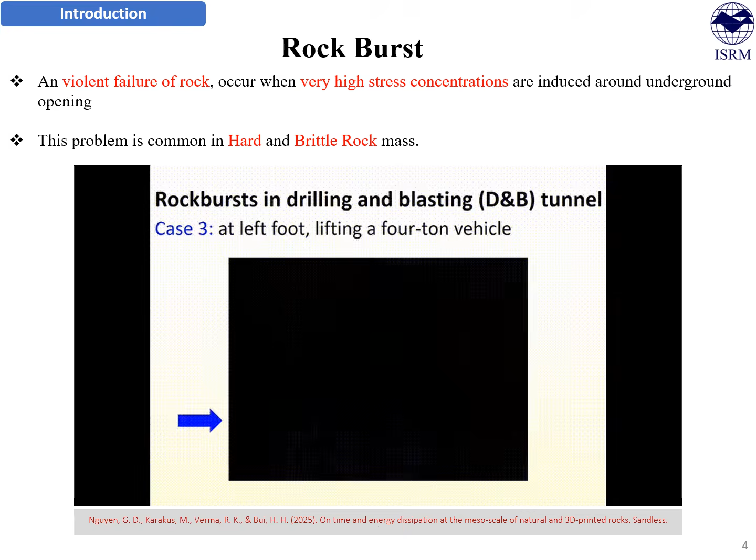Rock burst is a broad term often used to indicate a violent failure of rock in deep underground mining conditions. When I say deep underground mining conditions, I mean high in situ stress scenarios. As we go deeper, the in situ virgin stress keeps increasing, and when we excavate underground in such a situation, the stress around the opening further intensifies, which often, especially in hard and brittle rocks, results in violent failure of rock.

One example is shown in this video where a bursting event has occurred and it has lifted an entire 4-ton vehicle.

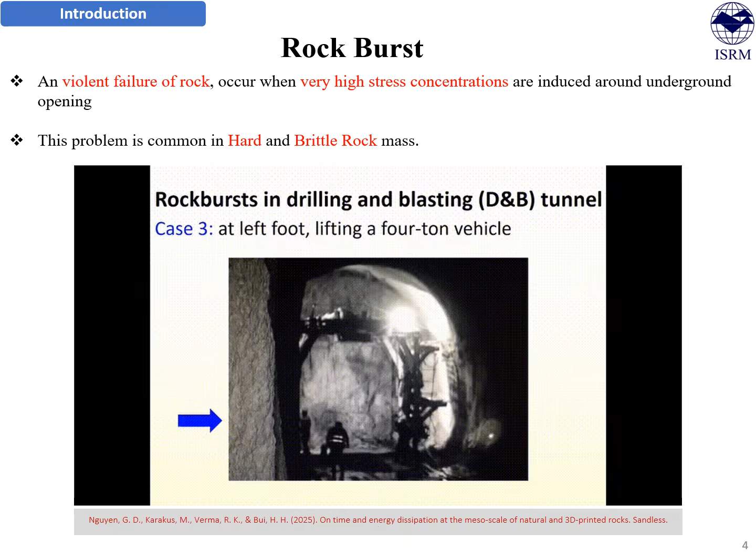This video presents another example of bursting, that is rock burst. It will occur on the right hand side floor of this drive. You can see - as you can see, these two miners narrowly escaped this event, which is not very common.

Often the bursting occurs at relatively higher magnitude, which results in severe consequences including loss of lives, delay in project, economic loss, loss of time, and sometimes it also triggers seismic events, which of course can be fatal.

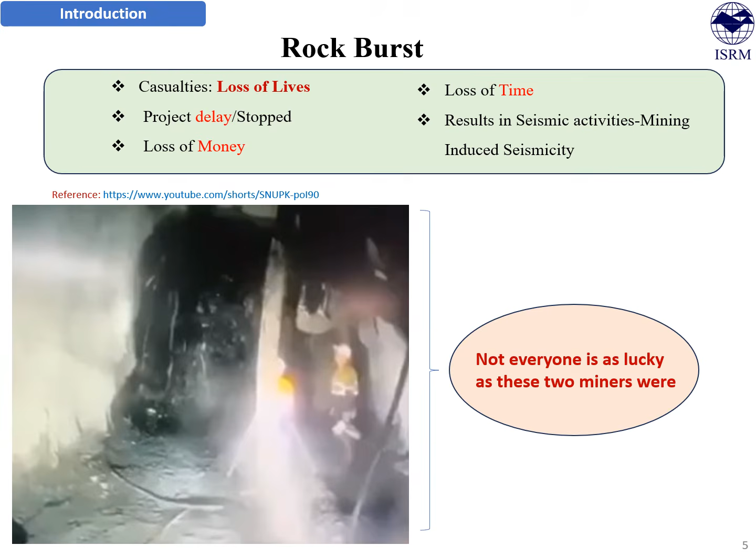As I mentioned earlier, rock burst is a broad term. There are different classifications of rock burst available in the literature. Some of these are pillar burst, strain burst, and fault slip burst.

This work is focused on strain burst, that is bursting of rock around underground openings in deep underground mining conditions because of high stored elastic strain energy. When we go deeper, the rock mass is highly stressed, and when we excavate, the strain energy stored in the rock mass around the opening sometimes exceeds its requirement to cause failure. That excess strain energy releases when we provide a free face in the form of excavation, and that release of excess strain energy is often violent, in the form of bursting - that's what we call strain burst.

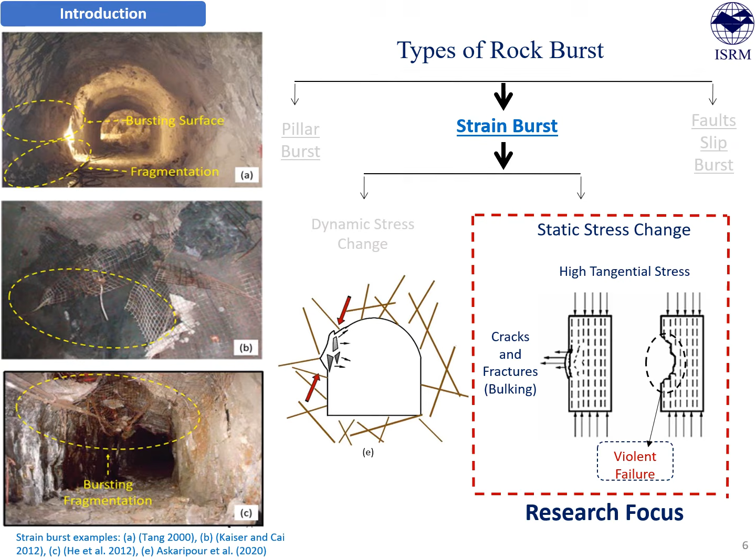You can see 3 examples of strain burst where mesh bulking and failure in the back and the side walls has occurred because of this violent event.

Strain burst is a complex problem. If we look at underground scenarios, each scenario is different, so explicit evaluation of bursting can be very complicated and may not be practical. However, we need to understand that if the rock in the rock mass around the underground opening has the potential to burst, strain burst may likely occur. However, if the rock lacks the potential to burst, then under in situ conditions it is very unlikely that strain burst will occur. So the focus of this research was to develop an energy based framework to quantify the burst potential of rock.

So to evaluate this, there are four main factors to be considered. The first is material property, which in principle controls the mechanical response of rock in any loading-unloading conditions. The second factor is in situ stress conditions, that includes virgin in situ stress and redistributed in situ stress after excavation, which indicates change in the boundary conditions. The last aspect is the geometrical aspect, meaning the specimen or size of the rock around the opening, which in principle is controlled by in situ discontinuities in the form of faults and fractures.

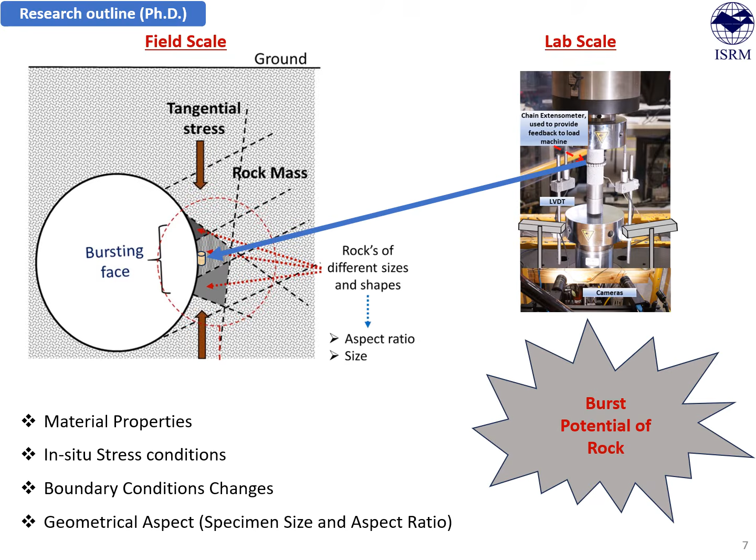Now, to start with, the material properties. There are three main categories of material properties required for the estimation of burst potential. The first one is strength, that includes strength of rock under compression and under tension.

For compression, we have standard uniaxial compression strength test. Their lateral control is also available to capture the true post-peak behavior under compression. In terms of tension, we have indirect tensile strength test, called Brazilian disc test.

Now, the applicability or the reliability of its tensile strength estimation has been under debate for very long because it depends on the crack initiation point. In the literature, it's been established that if the crack initiates at the center of the disc, then the corresponding result for tensile strength estimation is reliable, else it is not. So that was one thing we need to focus on in this research.

The other properties are elastic properties, including elastic modulus of rock and Poisson's ratio, and energy dissipation characteristics of rock, that include fracture energy in shear band when the rock is subjected to compression. This can be evaluated from uniaxial compression strength test or triaxial test.

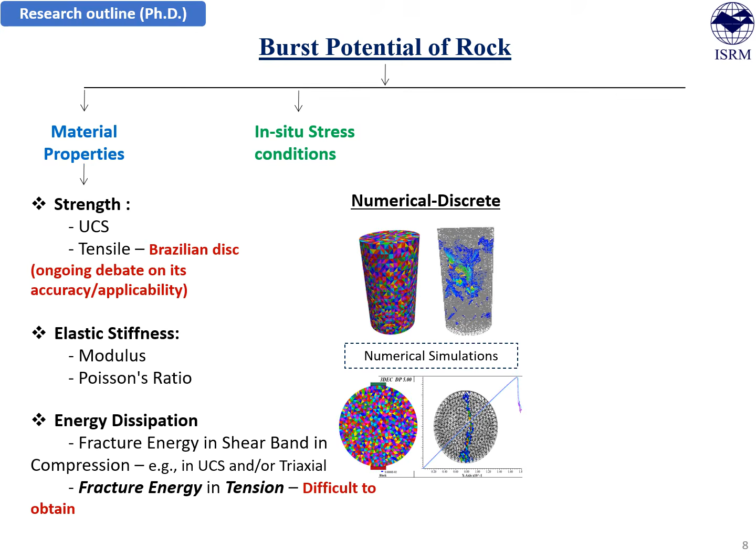The other factor is in situ stress conditions, followed by changes in boundary conditions. Now, when we excavate, obviously, we provide a free face to the rock around the excavation to dilate. That change in boundary conditions enables rock to release its excess strain energy, and the amount of excess strain energy governs the magnitude of bursting, which needs to be evaluated while calculating the burst potential of rock.

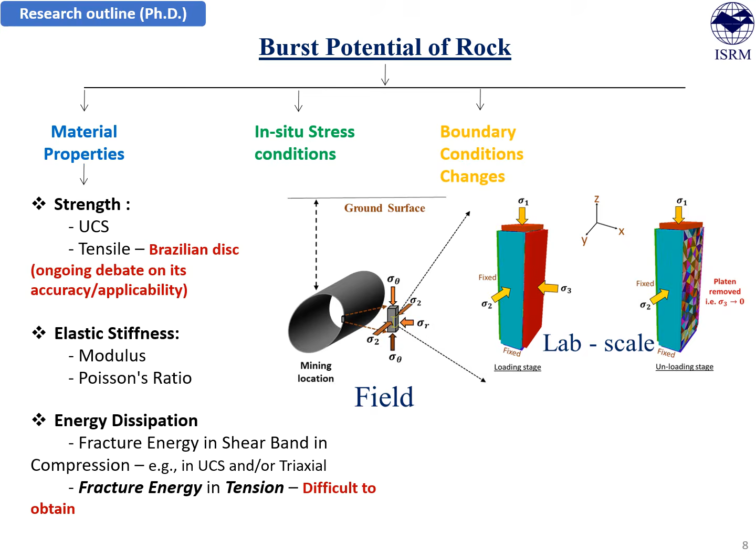And at last, geometrical aspect. There are two categories for that: one is aspect ratio and second is specimen size. When we say aspect ratio, that means if we keep the width and breadth of the specimen constant and keep increasing the height, we are changing the aspect ratio of the specimen. And with that change in aspect ratio, how the burst potential of rock varies needs to be considered.

And the specimen size as well. That means as we keep increasing the size of the specimen, what effect we get on the burst potential of rock. These factors have to be taken into account when we calculate the burst potential of rock, because in underground in situ scenarios, the size of rock is beyond our control. It is governed by in situ discontinuities, which is very difficult to capture for each and every cut in underground mining scenarios, when we take cuts in drives and when we fire stopes.

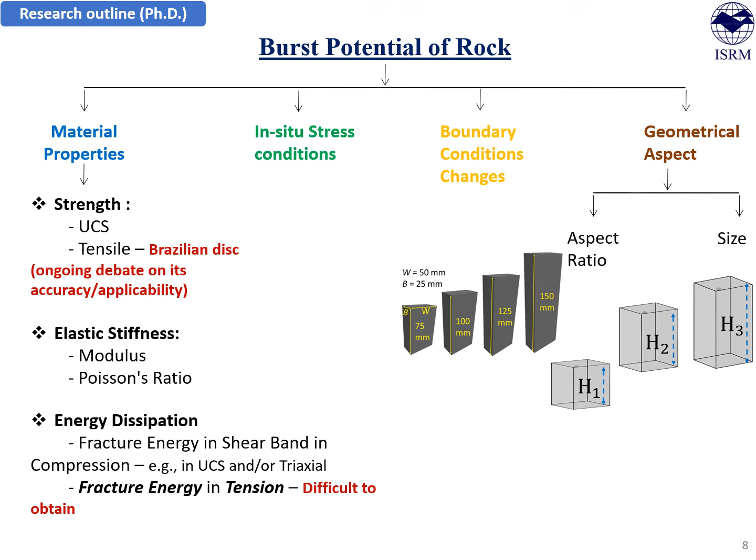Now, to address this problem, what we did in this research is systematically collaborate three approaches: experimental, numerical, and theoretical, because we understand that no single approach is sufficient enough to address this complicated problem.

Now, from the experimental approach, the intent was to get the required material properties: strength, elastic, and fracture properties. As I mentioned earlier, the fracture property in tension was difficult to obtain from conventional approaches, and that motivated us to develop a new experimental approach called AUSBIT, that is the Adelaide University Snap-Back Indirect Tensile Test. Now these experiments enabled us to obtain required material properties, including strength, elastic, and fracture.

And the AUSBIT experimentation also provided a preliminary indication of the burst potential of rock, that was later verified from developed theoretical and numerical approaches.

In terms of numerical approaches, we adopted a hybrid 3DEC Itasca framework where the tetrahedral blocks are zoned to ensure that they are deformable. These deformable tetrahedral blocks form a continuum frame, and these tetrahedral blocks interact with each other via contact. Now the behavior of these contacts is controlled by a contact model, which plays an important role in capturing the fracture in the given rock specimen.

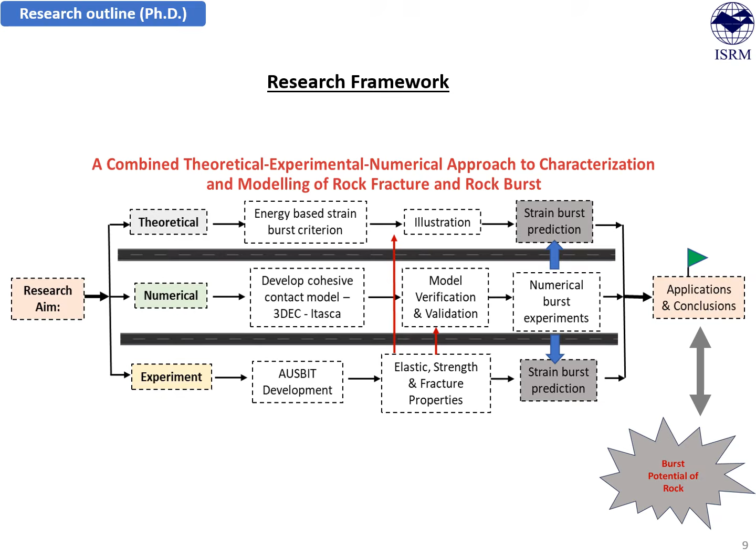Now to provide further details, we will go through these individual approaches one by one, starting with the experimental approach.

As I mentioned earlier, the aim of the experimental approach was to estimate the required material properties including strength, elastic, and fracture properties. For that purpose, we started with two conventional approaches named uniaxial compression strength test and Brazilian disc test.

The UCS, or uniaxial compression strength test, enabled us to calculate UCS strength and elastic properties including elastic modulus and Poisson's ratio. When we started doing the Brazilian disc test, we realized there are two key issues associated with this experimentation. The first one is its reliability. In the literature, we found that the reliability of these results heavily depends on the crack initiation point when the disk specimen is compressed diametrically. And the second issue we found is the uncontrolled cracking of the disk specimen, which is the result of local scale uncontrolled dynamics, which has not been addressed efficiently in the available literature.

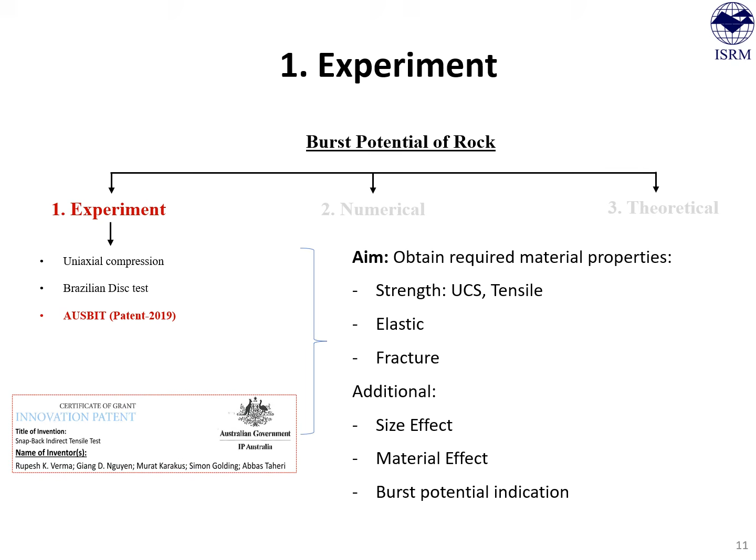Now, the Brazilian disc test. You can see it's a simple experiment. In this experiment, we take a disc shaped specimen and we compress it diametrically and record load versus displacement response. We capture the peak load at which the specimen cracks. Now that peak load P is linked with the tensile strength of the material. Simple experiment and easy to perform.

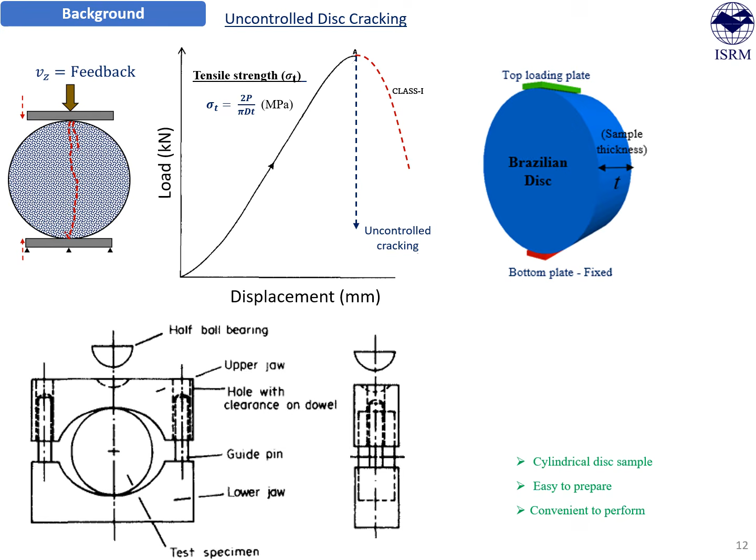Now the issue was, first, the reliability of the tensile strength test. In the literature, it was established that if the crack initiates at the center of the disc specimen, then the corresponding peak load will provide a reliable estimation of tensile strength. However, in the literature, and in laboratory experiments also, we have seen that often the crack does not initiate at the center of the disc. Instead, it initiates at the loading ends because of high localized compression. Now, in those scenarios where the crack is not initiating at the center of the disc specimen, the reliability of the tensile strength estimation can be debated.

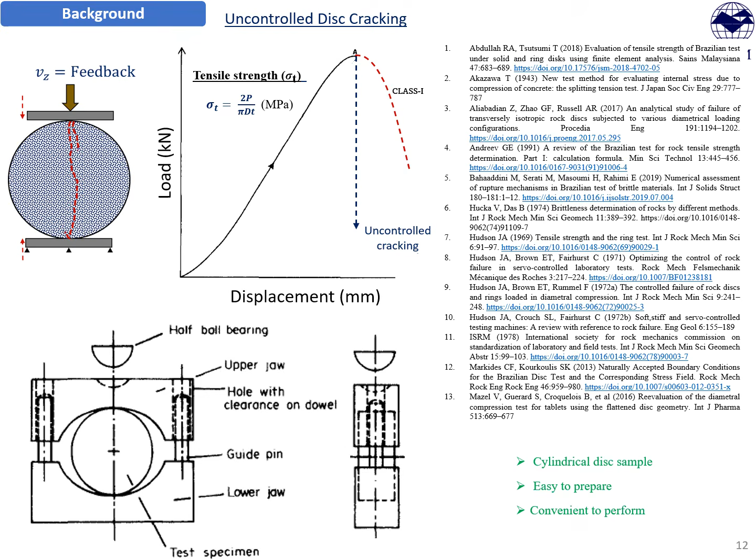The second aspect is its uncontrolled dynamics. We can see that this experiment can efficiently capture the class 1 behavior of rock. However, it cannot capture the class 2 behavior, which is more common in hard and brittle rocks. In those cases, as we reach the peak load P, the specimen cracks uncontrollably and the load drops immediately to its residual strength. There was no way it could capture the class 2 behavior, which indicates the true mechanical post-peak behavior of the given rock type or brittle material.

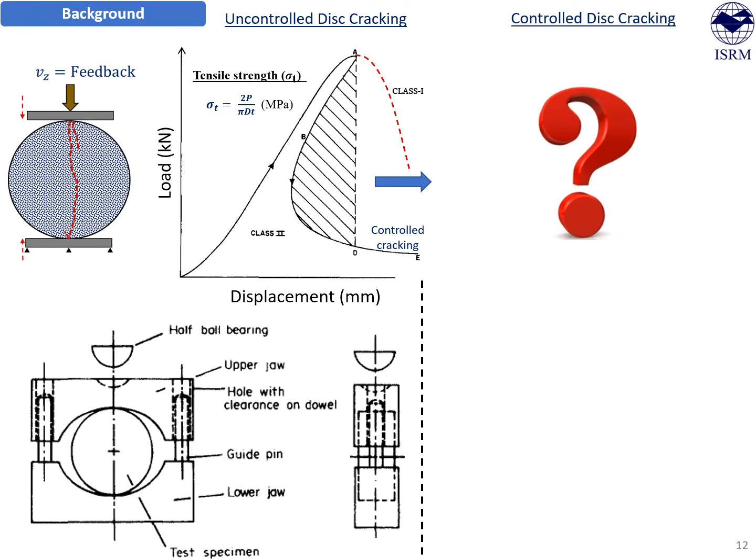As mentioned earlier, the first issue was the correct tensile strength estimation. So we started using advanced instrumentation. We thought with a high speed camera, using digital image correlation technique, we could capture the local scale behavior in quantitative terms and link it with material property, like tensile strength estimation.

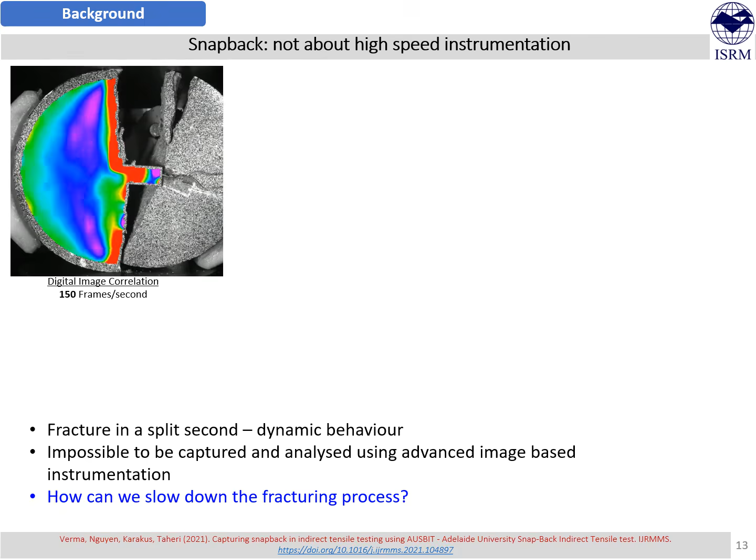However, we realized that the disc specimen cracks in a fraction of a second, which is very quick. We can see the cracking pattern as well, which clearly shows that the crack happens, and thereafter there has been a release of excess strain energy, which might have resulted in these secondary cracks.

Now, with the high speed camera, we tried different frames per second with different image capturing speeds. We started with 5 frames per second and extended it to 150 frames per second. However, with all these variations in frames per second, we realized that the local scale dynamic is so dominant that it couldn't allow us to quantify or capture the local scale behavior in quantitative terms to link it with material property.

And that made us realize that snapback is not about high speed instrumentation, but about the local scale dynamics. If we could control this local scale dynamics associated with disk cracking, we could enable efficient application of digital image correlation or high speed instrumentation. Otherwise, these approaches could be limited to strain contours without any quantitative assessment.

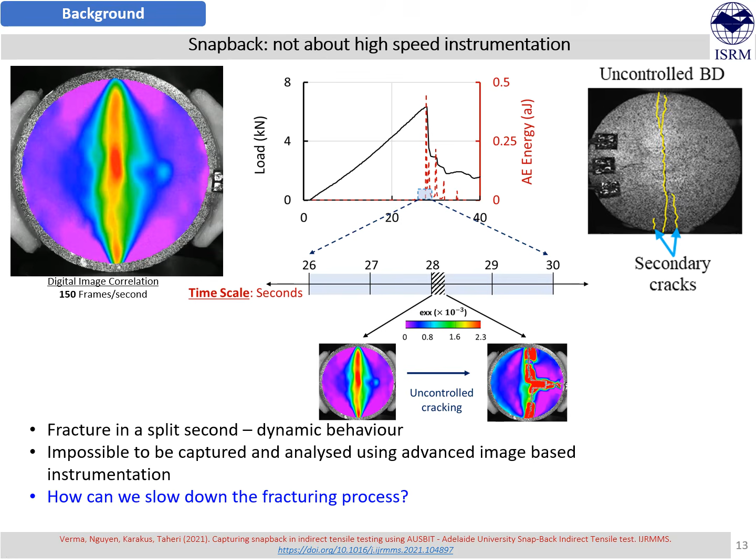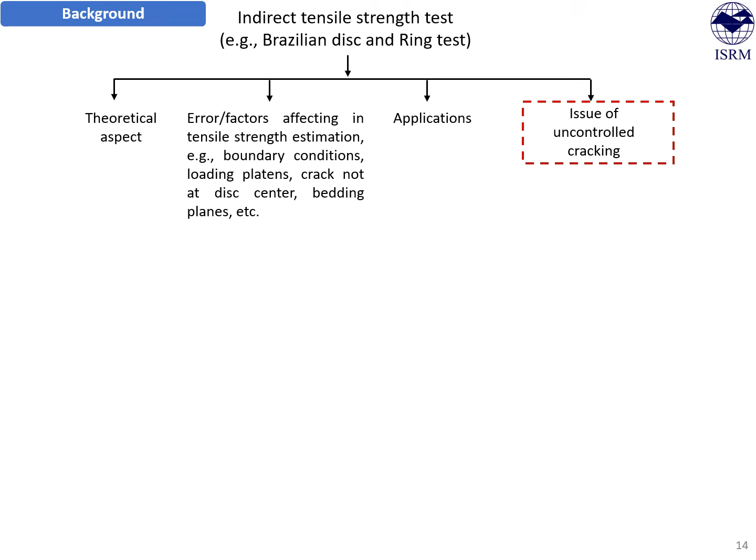Thereafter, we again went back to literature to evaluate whether anything has been done regarding this issue of uncontrolled cracking. We realized lots of work has been done. However, most of this work around indirect tensile strength testing focused on ensuring crack initiation at the center of the disk. Literature recommends changes to the loading angle to ensure the crack initiates at the center of the disk specimen. These approaches were successful up to a certain extent, but their application on various brittle materials can be debated. At the same time, we realized the issue of uncontrolled cracking has not been addressed efficiently in available literature.

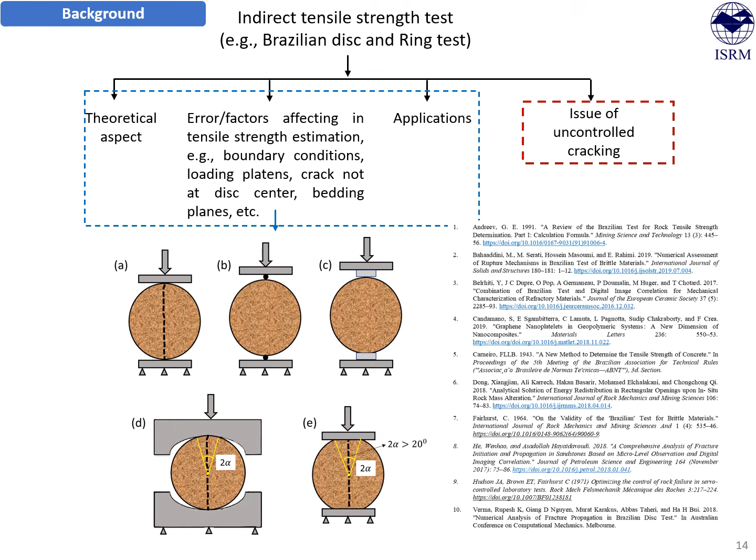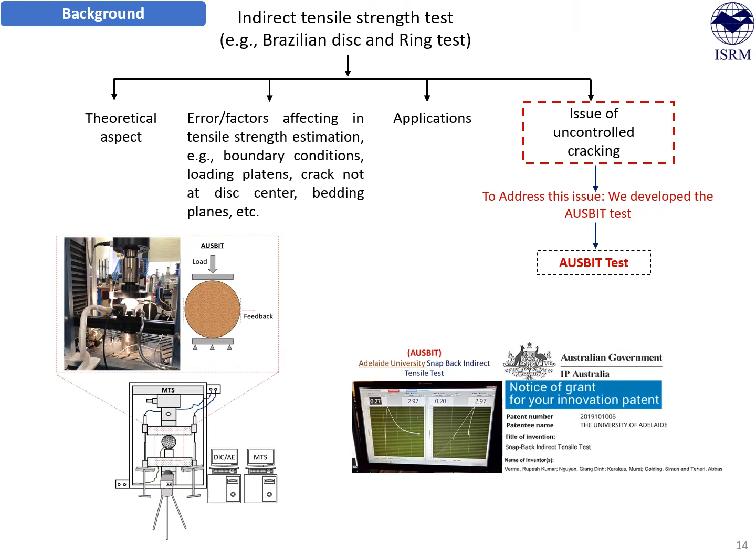That motivated us to develop a new experimental approach named AUSBIT, which stands for Adelaide University Snap-Back Indirect Tensile Test. The AUSBIT experimentation setup is relatively simple, or straightforward we can say.

In this experimentation, we use a lateral LVDT to capture the lateral deformation of the disk specimen, and that information governs the vertical diametrical loading rate of the disk specimen. So what we do in this setup is ensure that the disk specimen undergoes constant or consistent lateral deformation throughout the experiment.

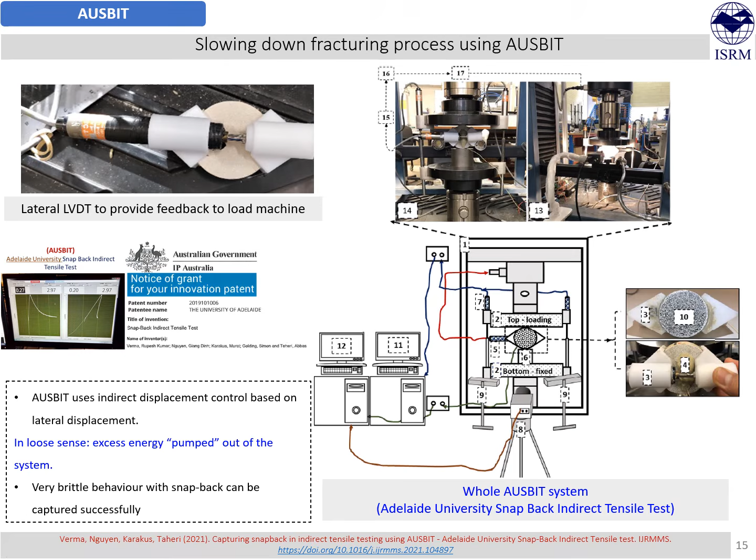That means if the lateral deformation of the disk specimen increases, the AUSBIT experimentation, which uses servo control, tends to reduce the loading rate to ensure the lateral deformation rate further reduces to our predefined level. And if the lateral deformation rate reduces below our predefined level, the vertical diametrical loading rate increases accordingly. By doing that, we were successful in prolonging the instant cracking of the disk specimen.

You can see from these two disk specimen cracking videos that in the conventional approach, the disk was cracking in a fraction of a second. Now the same cracking process has been prolonged to several hours in AUSBIT experimentation.

The acoustic emission energy response indicates that the whole cracking process is a valid cracking process, not the machine's mechanical unloading. You can see there has been a consistent release of acoustic energy, indicating continuous damage during disk cracking under the AUSBIT experimentation post-peak response.

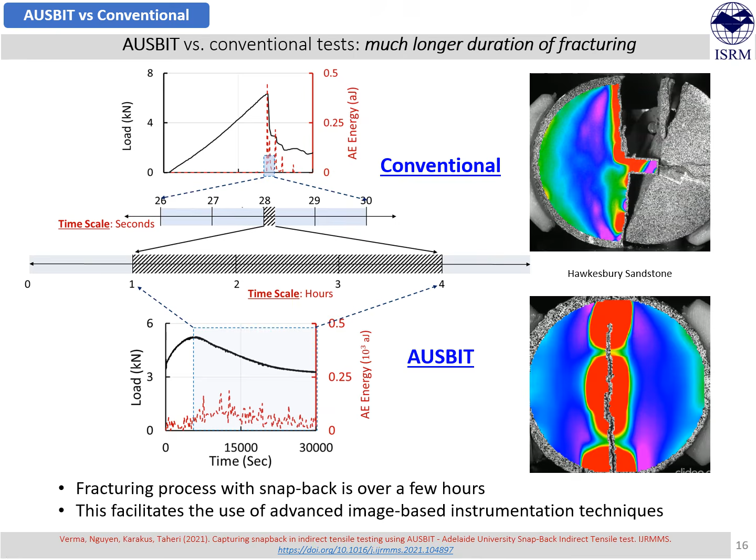The same disk specimen in controlled AUSBIT experimentation can produce true post-peak behavior with snapback response, and the crack shows no sign of secondary cracking. That means the specimen has consumed the amount of strain energy required for the vertical diametrical crack, and the excess strain energy has been successfully removed to enable the snapback response and capture the true post-peak behavior of the disk specimen.

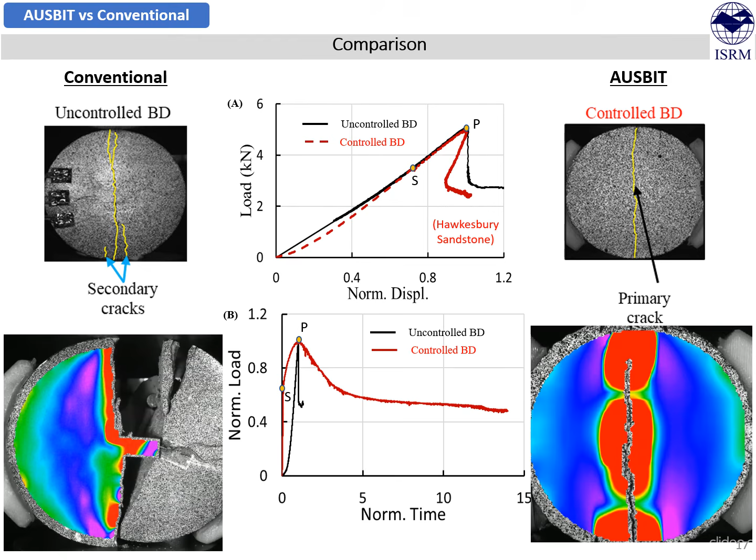In terms of the time frame window, we can see that the disk specimen, which was cracking in a fraction of a second, now has its post-peak cracking behavior prolonged to several hours.

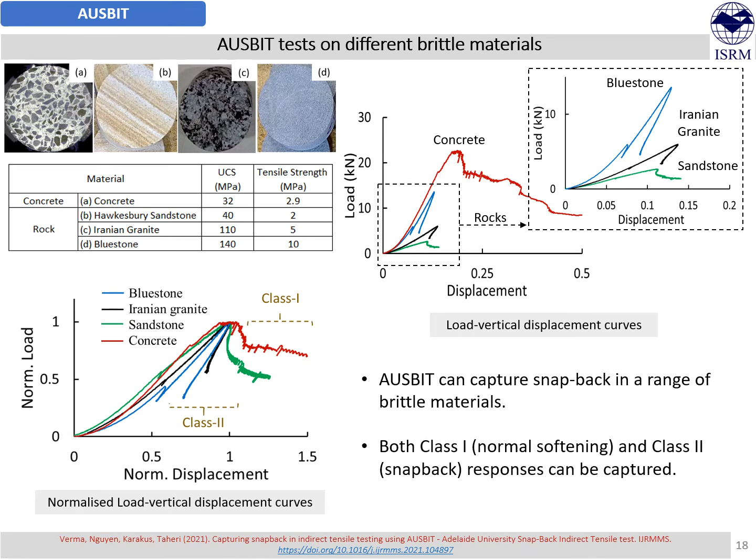Now from the normalized load versus displacement response, we can see that concrete undergoes or performs Class 1 response in terms of its post-peak behavior, whereas brittle materials like rock demonstrate Class 2 behavior. These Class 1 and Class 2 behaviors were both successfully captured by AUSBIT experimentation, which was not possible earlier in the conventional approach.

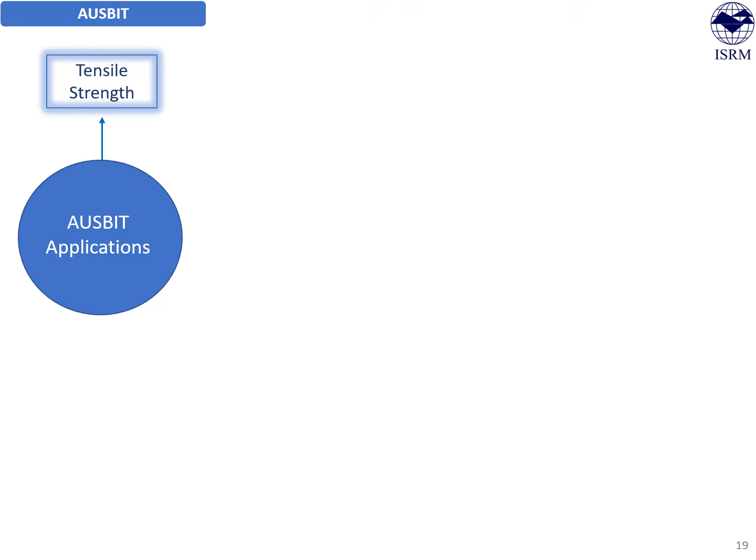Now, yes, AUSBIT can capture true post-peak behavior of disk specimen under diametrical cracking. But what are the other advantages? If we list all the benefits of AUSBIT applications, we can start with tensile strength estimation, which of course is already there. Apart from that, we can calculate the fracture property of rock.

In AUSBIT experimentation, we can capture the snapback response, or true mechanical post-peak behavior of the disk specimen, which wasn't possible in the conventional approach. Now, because of this snapback response, we can calculate the excess strain energy and the strain energy required to cause or create the vertical diametrical crack.

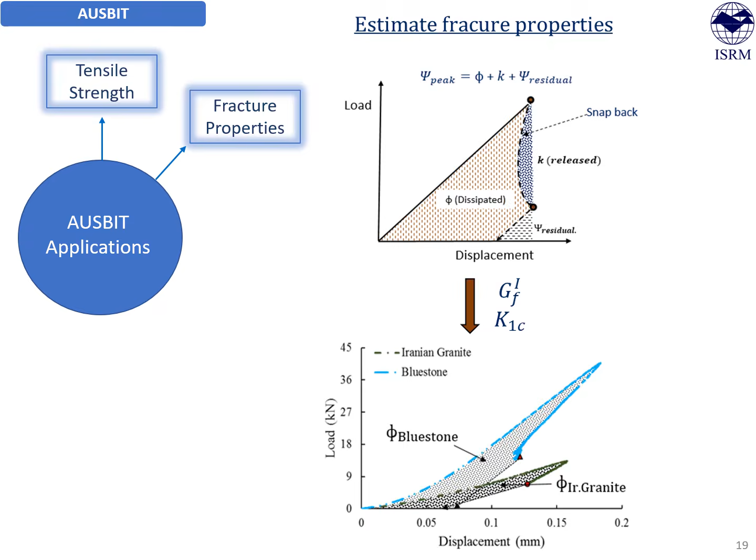With that, now we can calculate the fracture energy and fracture toughness using the same AUSBIT experimentation. In addition to this, we can also assess size effect.

There are two types of size effect: statistical size effect and energetic size effect. Statistical size effect is like as we increase the size of the disk specimen, we end up getting lower tensile strength. This is because as we increase the specimen size, we can expect an increase in the inherent defects, and that inherent defects because of increased specimen size result in a relatively lower estimation of tensile strength.

Now this statistical size effect can be evaluated from the conventional approach and from AUSBIT experimentation as well. However, the energetic size effect cannot be captured or assessed via the conventional approach. However, thanks to AUSBIT, we can now analyze that as well.

The energetic size effect is the effect of specimen size on the post-peak snapback behavior of the disk specimen. As we keep increasing the size of the disk specimen, we expect a relatively higher magnitude of snapback response, because as we increase the disk specimen size, the increase in volume will result in an increase in the strain energy stored in the disk specimen. At the same time, the fracture energy requirement also increases, but that increase corresponds to the fracture surface.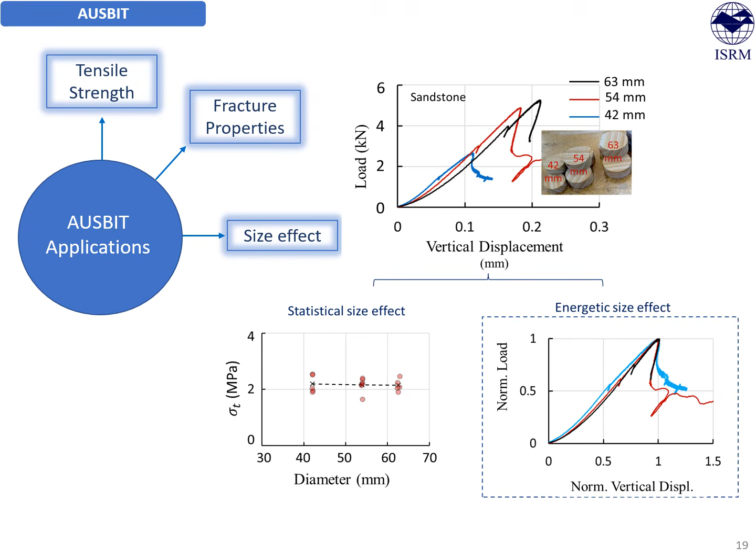Now the difference between these two energy requirements - the strain energy stored inside the disk specimen, which increases with volume, and the strain energy required to cause fracture in the disk specimen, that is the diametrical crack, which increases with crack surface - that difference results in the variation in the post-peak snapback response that corresponds to the energetic size effect, which thanks to AUSBIT we can now capture.

In addition to this, we can also capture the effect of material change on the post-peak behavior. As we have seen in the previous slide, as the material becomes harder and brittle, we observe a higher magnitude of snapback, whereas if the material becomes less brittle like concrete, we observe even class 1 behavior. So both class 1 and class 2 behavior can be captured by AUSBIT experimentation, which could be the result of variation in material effect.

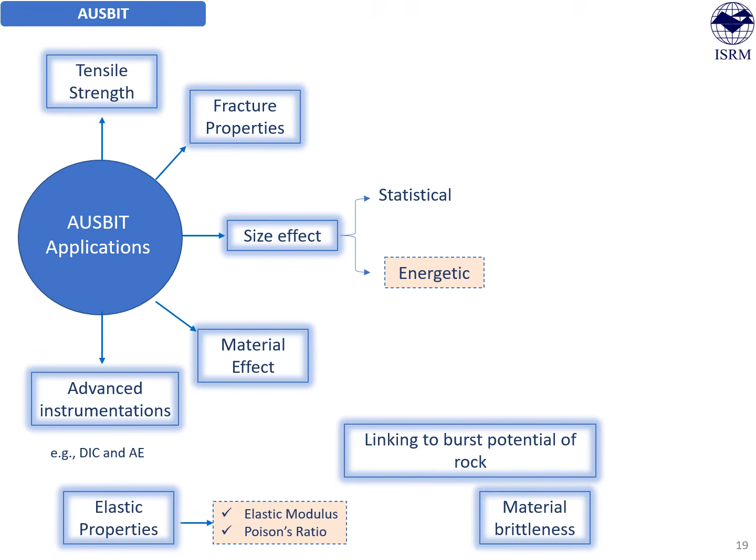In addition to this, as I mentioned earlier, AUSBIT enabled efficient application of advanced instrumentation, including digital image correlation technique and acoustic emission technique. This efficient application of advanced instrumentation enabled us to link the local scale behavior with the material properties in quantitative terms, and that also enabled us to get a preliminary estimation of burst potential of rock and the material brittleness.

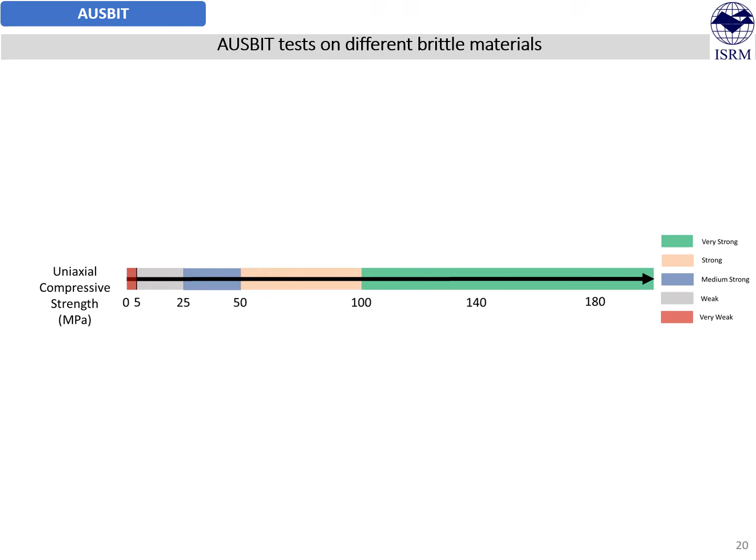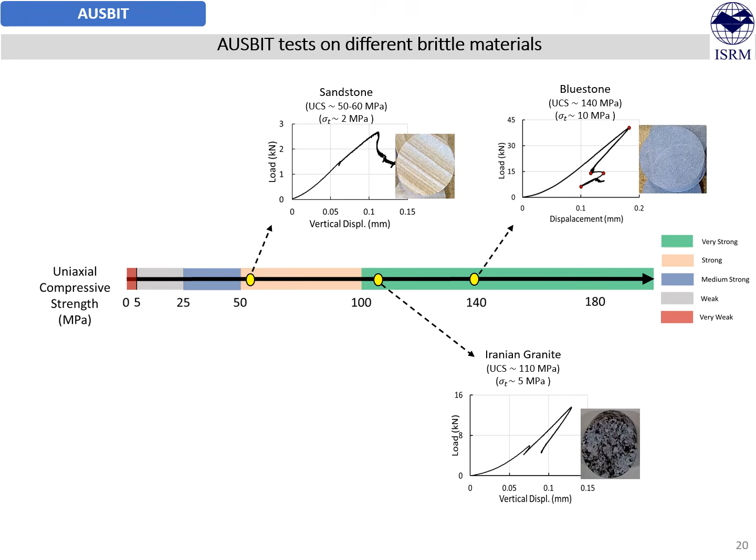With this successful application of AUSBIT experimentation, the next stage was to ensure that this experimentation can be applied to a variety of brittle materials. As I mentioned earlier, we started with Hawkesbury sandstone, and then we extended its application to Iranian granite, which is much stronger and more brittle compared to sandstone. Then we further extended its application to bluestone, which is even stronger and more brittle compared to the earlier two rock types, and we further extended its application to Australian granite as well.

On the other side of the spectrum, we extended its application to concrete, which presented class 1 response as compared to the brittle rocks like bluestone, Australian granite, and Iranian granite. We extended its application to coal as well, and 3D printed cement paste with different bedding orientation. Now as you can see, AUSBIT can be applied to a variety of brittle materials, ensuring its effective and larger application across the varied spectrum of brittle materials.

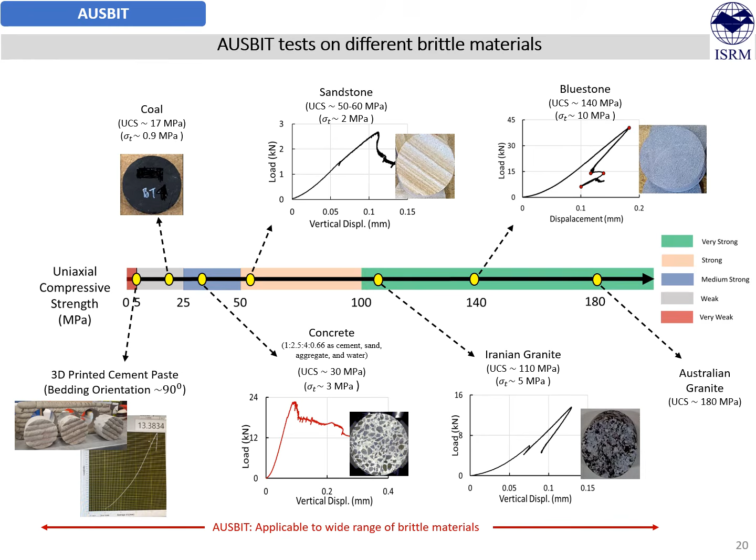After experimental work, the second approach we adopted in this research is the numerical modeling approach. For this approach, we used the hybrid numerical modeling framework provided by Itasca 3DEC. The intent of this approach is to develop a 3D numerical modeling space where we can perform numerical strain burst experiments outside the calibrated dataset. For that purpose, we developed a new cohesive contact model and implemented that model in 3DEC Itasca. The intent here was to capture realistic or reliable cracking behavior, or specimen fracture behavior, under the given loading conditions.

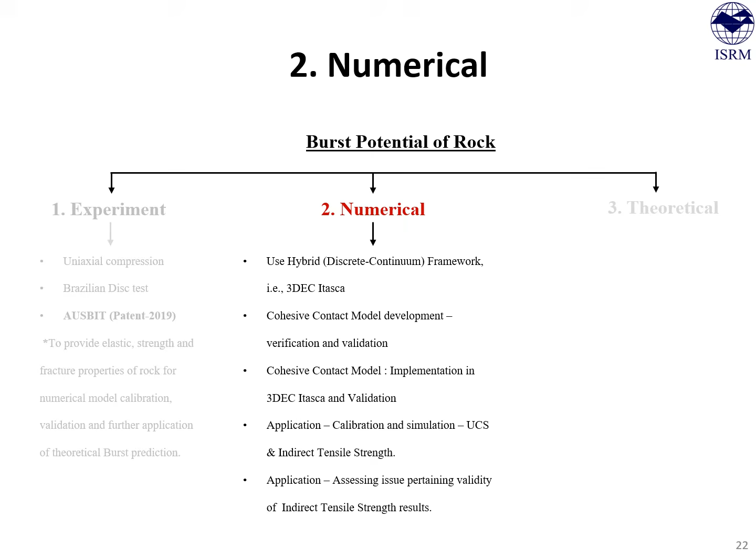We used this numerical modeling framework to calibrate using UCS and Brazilian disk tests, and later used it to perform burst experiments. Now to start with the fundamentals: we can see the rock specimen is basically a combination of grain aggregates, and these grain aggregates interact with each other via contact forces because of intergranular cementitious bonding.

Now when we subject this rock specimen to any given loading condition, for example uniaxial compression, this specimen cracks because of the loss of intergranular cementitious forces, and the crack in majority of cases is due to the loss of these contacts, not because of grain crushing.

Now to mimic that fracture process numerically, in 3DEC we use 3D tetrahedral blocks. These blocks were made deformable via zones, and they interact with each other via a contact model. This contact model plays an important role in capturing the intergranular cementitious forces.

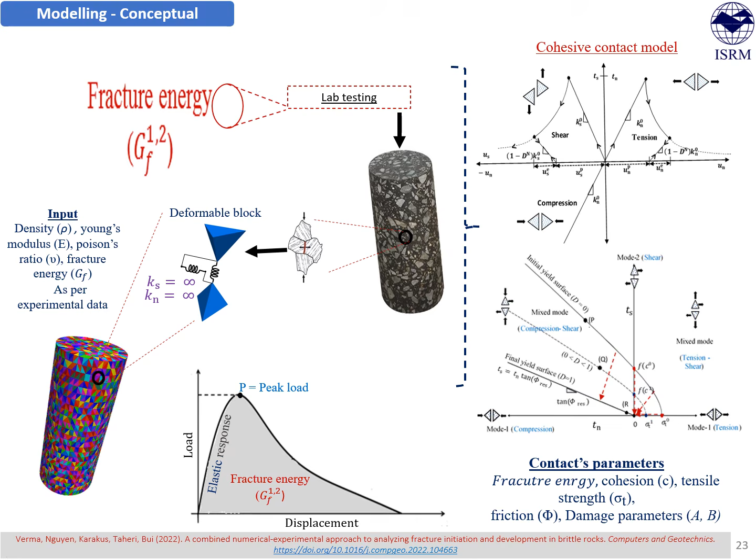That motivated us to develop our own cohesive contact model and implement that in 3DEC Itasca. The details of this cohesive contact model can be seen in the publication shown below in the slide.

The contact model under tension in post-peak behavior results in gradual degradation of strength, unlike immediate drop as shown in various available models in 3DEC and in other published literature as well. And the same goes under shear.

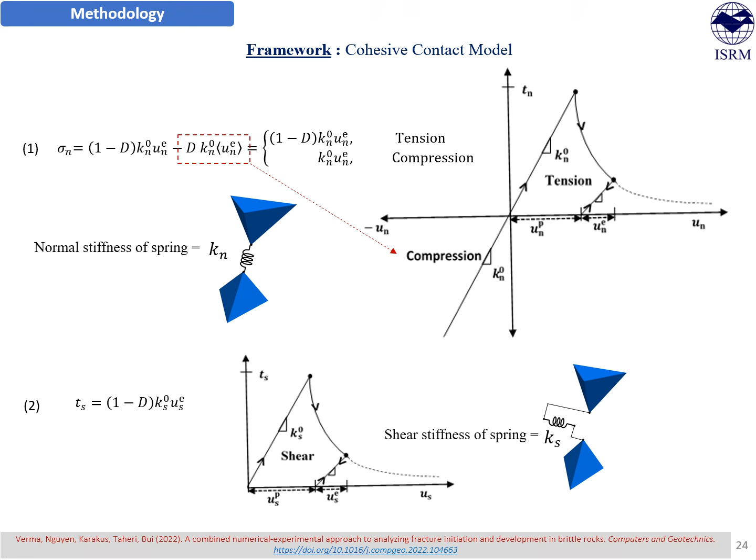The post peak strength of the contact degrades gradually, and that degradation corresponds to the damage. The magnitude of damage not only controls that degradation but also degrades the elastic response as well. So before peak we have certain stiffness, and that stiffness reduces with damage in post peak response, which is truly captured by this contact model.

This cohesive contact model also proposes a unified yield surface, and that yield surface evolves with damage. As the magnitude of damage increases, the yield surface shrinks, and eventually when damage reaches its maximum value, it shrinks down to the residual yield surface to capture the cracking process, the post peak degradation of contact strength.

The same goes for plastic potential, and the parameters this cohesive contact model uses are cohesion, tensile strength, friction, and dilation. Cohesion and tensile strength can be obtained from experiments directly; other properties need a bit of calibration. The damage is indicated by D, which increases with plastic deformation of the contact.

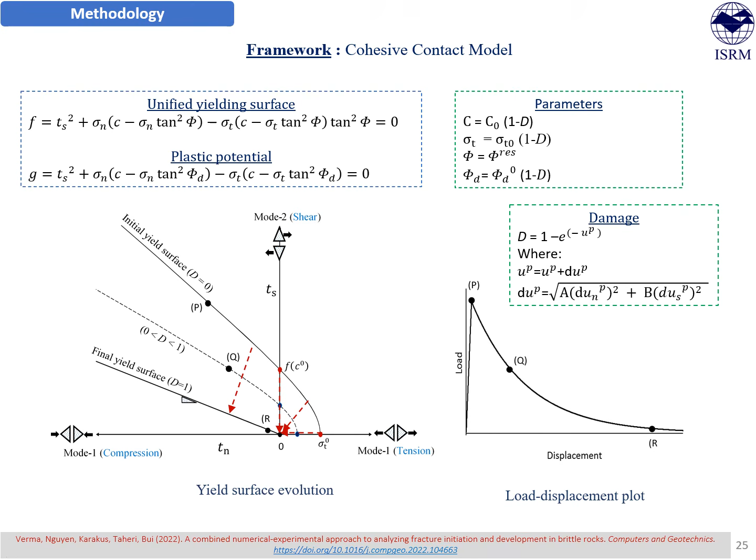Once the contact model was developed, it was verified using analytical solutions and numerical solutions, and thereafter it was validated using a mixed mode loading experimental case available in the literature.

And once it was validated, it was further implemented in 3DEC. For that purpose, we used the user-defined option in 3DEC and fish coding along with C++ programming to write that cohesive contact model code and implement it in 3DEC.

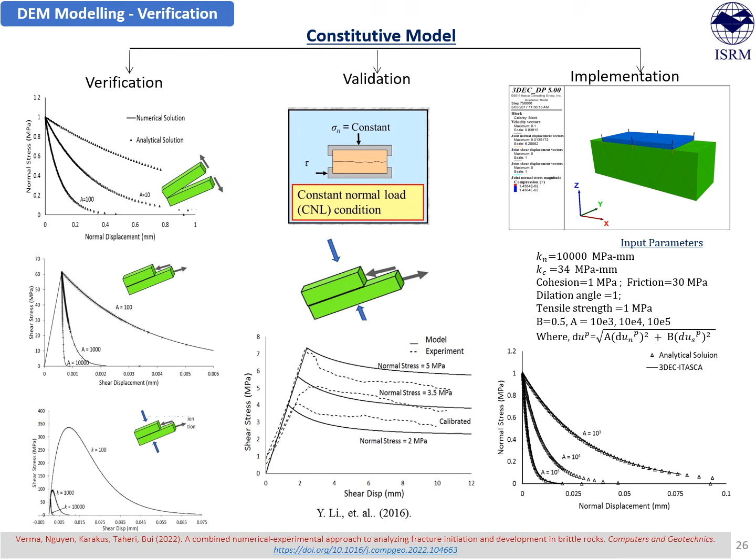Once implemented, the cohesive contact model was further validated using the experiments of mixed mode loading available in the literature.

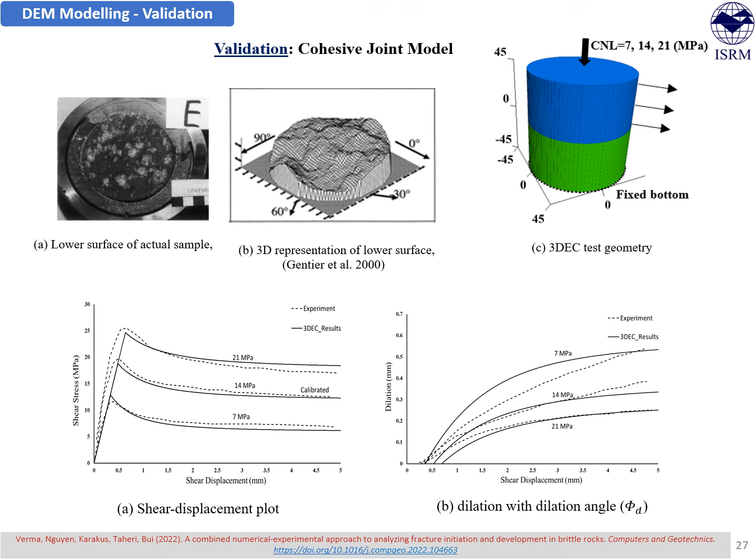Once validated, this cohesive contact model, which was implemented in 3DEC, is now calibrated to the given rock type. In our case, that is bluestone.

For this calibration process, we used two experiments. One is uniaxial compression strength test, and the second one is Brazilian disc test, that is indirect tensile strength test.

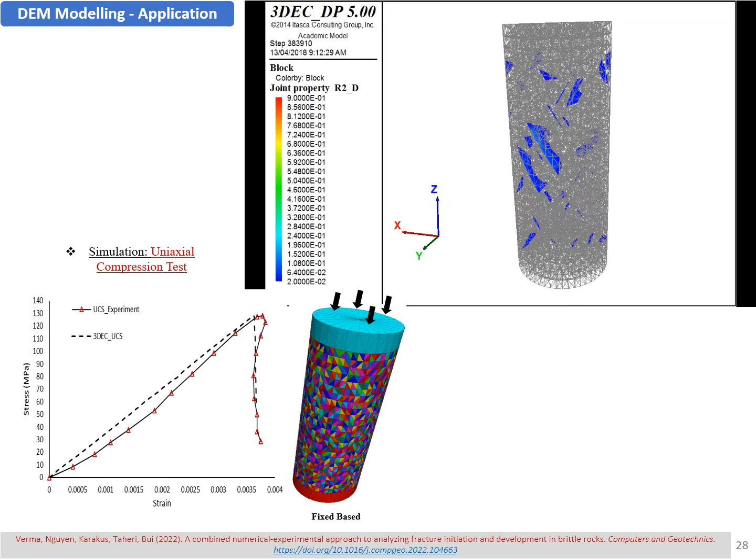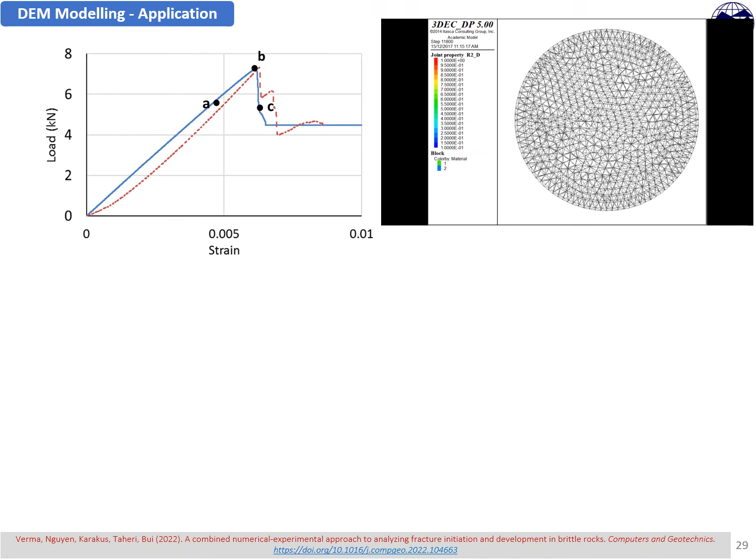The next set of experimentation in this calibration process was the Brazilian disc test. We can see that the load versus displacement response, or strain response, from these two sources, one from the numerical model and the other from experimentation, are pretty much well aligned.

At stage a we can see that the local scale damage started from the loading end, and that corresponds well in both numerical and experimentation. From experimentation we obtained these strain contours using digital image correlation technique, whereas from numerical we got the strain contours straight away.

At stage B, when the specimen cracks, the disc specimen cracks instantly, in a fraction of a second, and that cracking pattern of the numerical model also aligns well with the experimental observations, as you can see in the slide below.

And in stage c, the post-peak behavior, we can see a significant amount of secondary cracks at the loading ends, which also correlates well between the numerical output and the experimental observations. The video shows the damage evolution across the specimen diametrical axis in this conventional approach.

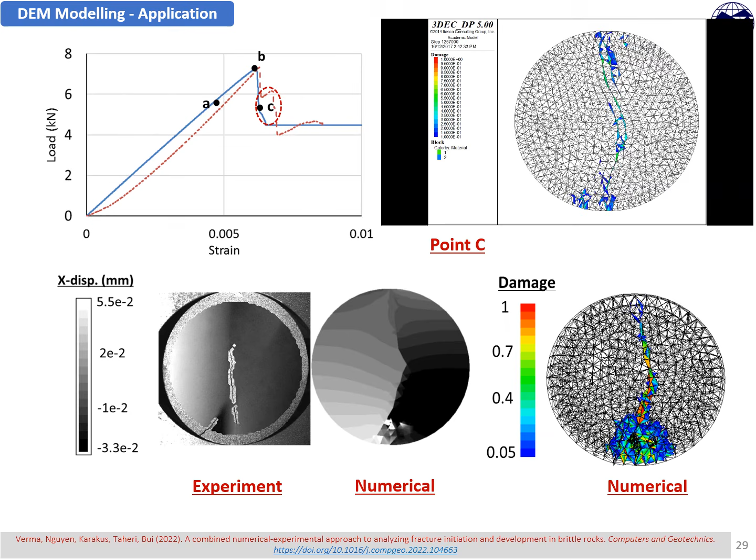Once the numerical modeling framework is developed and calibrated to the given rock type, that is bluestone in our case, the next approach is the theoretical one that we used in this research. The main aim of the theoretical approach is to develop an energy-based framework which can link key material properties including strength, elasticity and fracture with the burst potential of rock.

This energy-based framework that we have developed in the presented research proposes a burst envelope concept which can quantify the burst potential of rock, and we used the developed numerical modeling framework to verify the theoretical predictions.

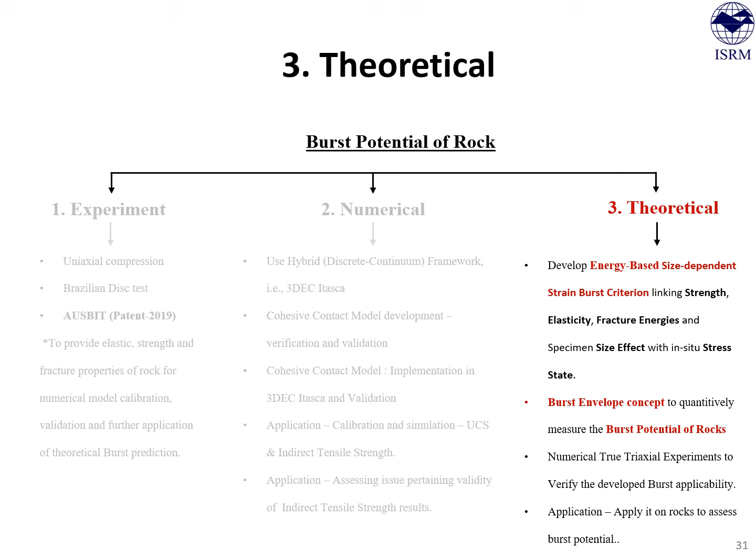As mentioned earlier, the burst potential of rock depends on four key important factors that include material properties, in situ stress conditions, geometrical aspect, and boundary condition changes.

Now, as you can see in this given example, when we excavate in an underground scenario, the excavation provides a free face. In the virgin stress state, if the rock is highly stressed and somehow storing more energy than its fracture requirement, it is in a confined form. Now, when we excavate, we provide a free face.

We remove the confinement, and because of this confinement removal, the rock, which is highly stressed and storing a significant amount of strain energy, gets a free face to dilate, and that dilation can be violent. The magnitude of dynamics or violent cracking because of that free face dilation depends on the amount of excess strain energy stored inside the specimen, and that in principle governs the magnitude of strain burst.

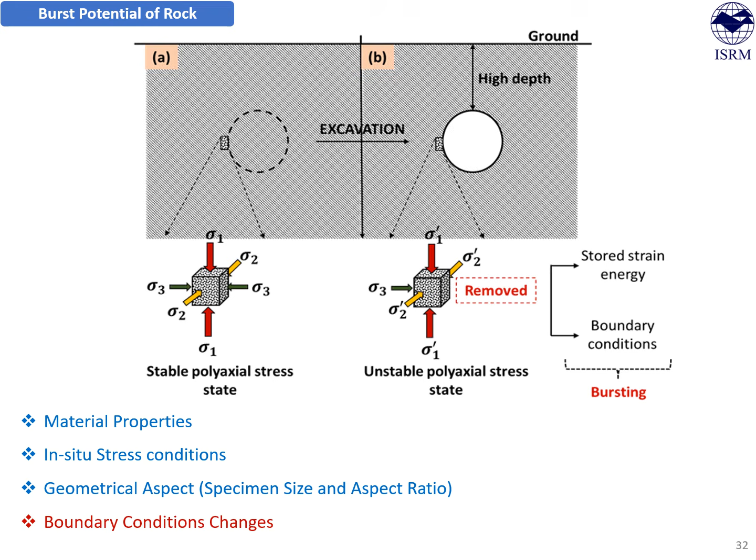This in principle forms the basis of our size-dependent, energy-based strain burst criteria or strain burst framework. There are two important components of this criteria: the first is elastic stored strain energy before bursting, and the second is dissipation capacity.

The elastic stored strain energy depends on the material type and its volume or the size of the specimen, whereas the dissipation capacity again depends on the material property and the fracture surface.

Now, when it's going to burst, that depends on the potential of the burst, which in our framework is indicated by this letter P. That's the ratio between elastic strain energy stored inside the specimen to the dissipation capacity.

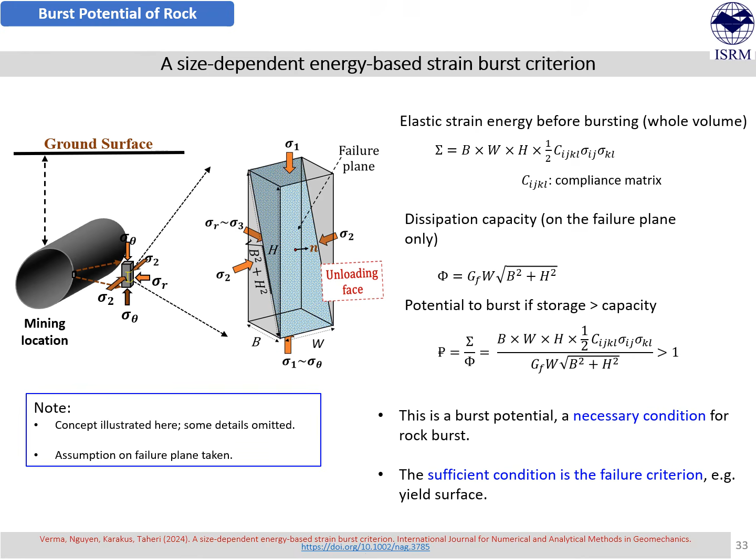How does this strain burst framework work? This strain burst framework provides a burst envelope. This is a 3D surface in three-dimensional principal stress space.

Now, for the given rock under the given in situ conditions, it will undergo bursting if the resultant stress state is located outside this burst envelope and it crosses the yield surface. If it is outside the burst envelope but still not crossing the yield surface, that means the specimen is still confined and it's not going to fail. If it's not going to fail, it's not going to burst as well. However, if it is outside the burst envelope and crosses the yield surface, it will burst.

The magnitude of bursting will depend on the distance of this resultant stress state from the burst envelope. Higher the distance, higher the magnitude of bursting that will be encountered.

At the same time, if the resultant stress state is inside the burst envelope and crosses the yield surface, the specimen will undergo failure but not bursting. And if the resultant stress state is inside the burst envelope and inside the yield surface, there won't be any failure and of course no bursting.

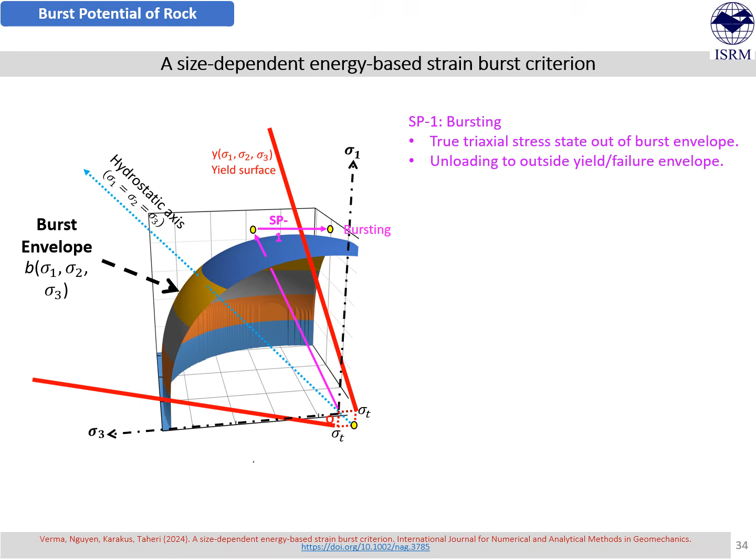For example, in stress path 1, the resultant stress state is outside the burst envelope and it has also crossed the yield surface. That means after excavation, bursting will occur in that given specimen where the stress state is outside the envelope and the yield surface.

In case of stress path 2, earlier the stress state was outside the burst envelope. However, after excavation, the stress state comes inside the burst envelope and it is not crossing the yield surface as well. So that means there won't be any failure and of course no bursting.

In stress path 3, the resultant stress state is inside the burst envelope and it is inside the yield surface as well. So there will not be any failure and of course no bursting.

In stress path 4, the resultant stress state, the stress state before the excavation and the resultant stress state, both are inside the burst envelope.

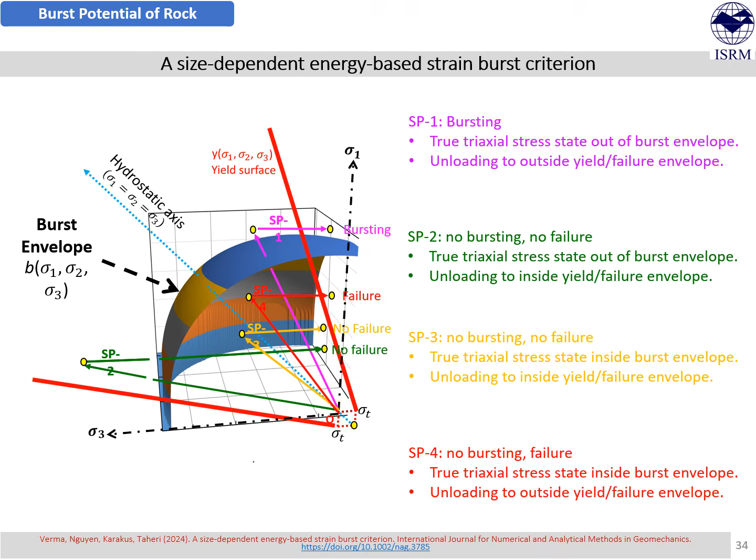However, the resultant stress state is crossing the yield surface, which means in this case the specimen will undergo failure but not bursting. This is the concept of the entire burst envelope and how it predicts whether bursting will occur in the given specimen under the given in situ condition, yes or no, and what will be the magnitude of that bursting.

Now, to verify our developed numerical modeling framework and our analytical energy based framework, we used numerical burst experiments. For example, we have taken 3 stress paths. This slide presents stress path 1, where we unload at sigma 1 equal to 180 MPa. As per our theoretical prediction, strain burst will occur in this scenario because the resultant stress state, as you can see in figure A, is outside the burst envelope and it is also crossing the yield surface.

Now, to verify this, we used a numerical true triaxial experiment. In that experiment, we considered a test specimen of the same dimension and used platens on all 6 directions. The platen on the bottom is fixed, and the platens on the other 2 directions, sigma 2 and sigma 3, are also fixed. The remaining platens on all 3 directions are used to apply polyaxial stress state conditions. In case 1, we first increased all these stresses, sigma 1, sigma 2, sigma 3, to the stress state where sigma 3 equals 30 MPa, sigma 2 equals 60, and sigma 1 equals 80 MPa.

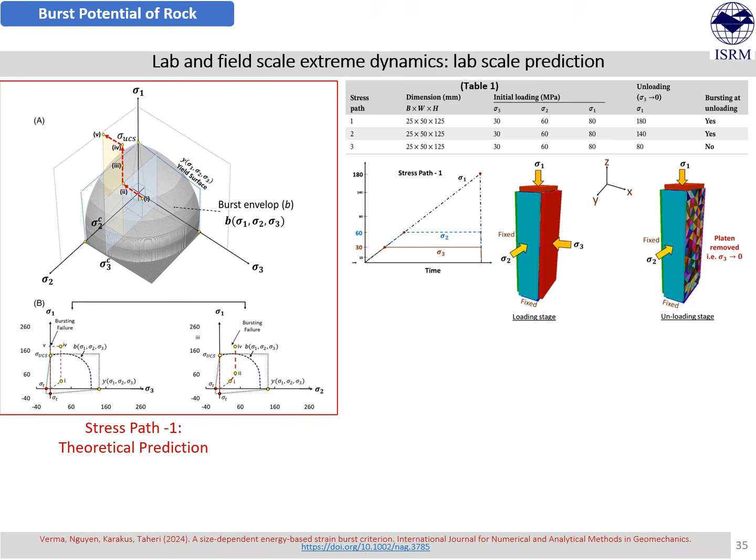Now this is what the numerical experiment shows. You can see that we reached unloading, and the bursting occurs. That verifies our theoretical prediction. We did the same thing with the other 2 stress paths as well, and our theoretical prediction was well aligned with our numerical experimentation. That verifies the applicability of our strain burst energy based criteria.

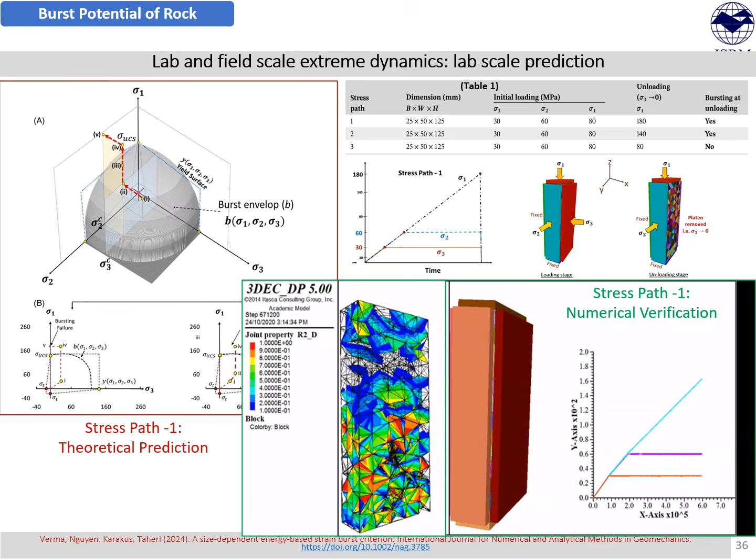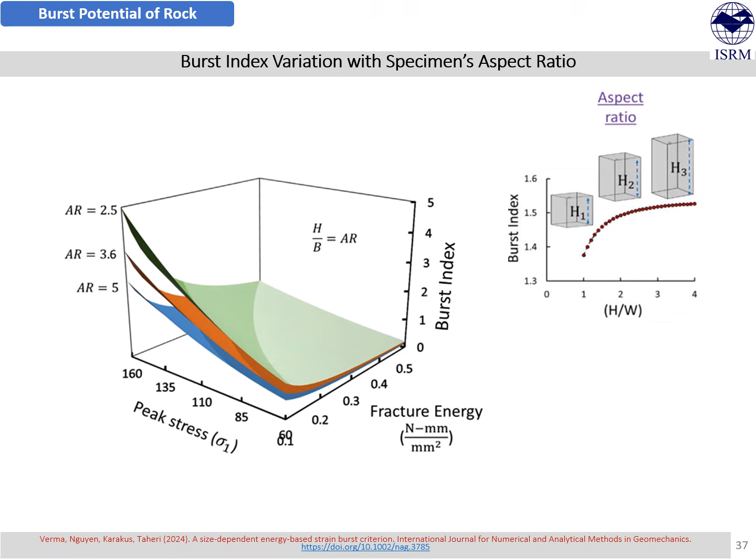With the increase in the height of the specimen, the burst potential of the rock increases up to a certain extent, and after that it stopped increasing further with increase in aspect ratio. That is because after a certain height, the diametrical cracking pattern across the specimen remains almost constant, meaning there is almost no further increase in the burst index. This also aligns well with observations available in the literature. The details can be found in the published article shown below.

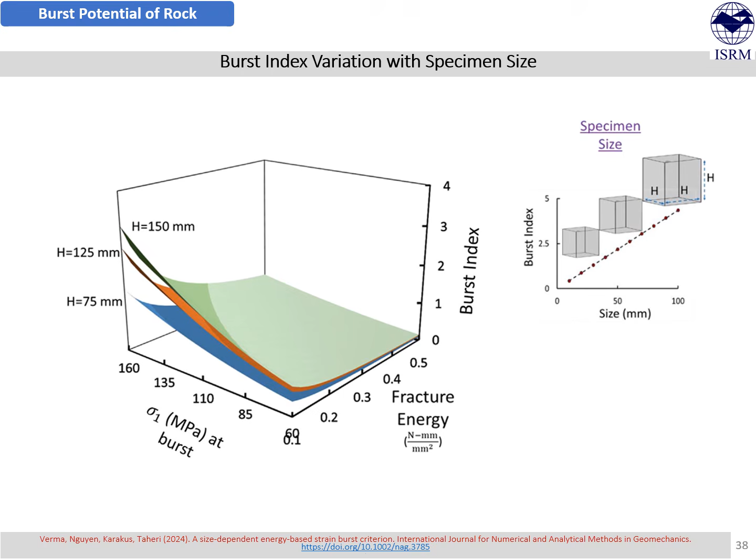The other aspect of size effect is specimen size. As we keep increasing the specimen size, the burst index, the burst potential of rock, keeps increasing. And by that way, we end up developing an energy-based framework to quantify the burst potential of rock.

As we can see, all three components — theoretical, experimental and numerical approaches — were very important to develop this energy based strain burst criteria, and this leads to the conclusions of this present study. The graphical representation of key conclusions from this study are as follows. In this study, we systematically collaborated three approaches: experimental, numerical and theoretical. The interlink between these approaches was essential to develop this energy based strain burst criteria.

The role of the experimental approach was to provide the required input parameters for the numerical modeling development framework, and as an input for the theoretical energy based framework application. To do that, we performed two simple experiments, UCS and Brazilian disk test, and did a detailed analysis of the applicability of the Brazilian disk test. After this assessment, we ended up developing a new experimental approach, patented in Australia, named AUSBIT — the Adelaide University Snapback Indirect Tensile Strength Test.

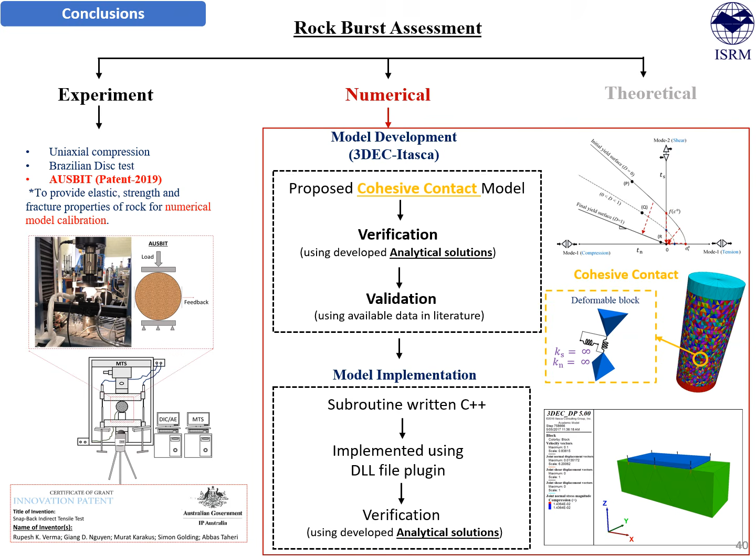Once the cohesive contact model was implemented in 3DEC Itasca, it was calibrated using UCS and Brazilian disk tests. Once calibration was done, we developed a numerical modeling framework where we could perform a burst experiment numerically, which would help us in developing and verifying our theoretical energy-based framework.

In parallel to the experimental and numerical approaches, we developed a theoretical energy-based strain burst criteria. This criteria proposes the concept of a burst envelope, which is a 3D surface in three-dimensional principal stress space.

This burst envelope links the key material properties, including strength, elastic and fracture properties of rock, which in principle govern and control its burst tendency, with in situ stress conditions and boundary conditions. It also takes specimen size effect into account.

We have already described the functioning of this burst envelope. The resultant stress state post excavation, with respect to this burst envelope along with the yield surface, governs the potential and the magnitude of bursting.

If the resultant stress state is outside the burst envelope and it crosses the yield surface, then strain burst is likely to occur, and the magnitude of strain burst will be dependent on the distance of this resultant stress from the burst surface, which in principle indicates the excess strain energy.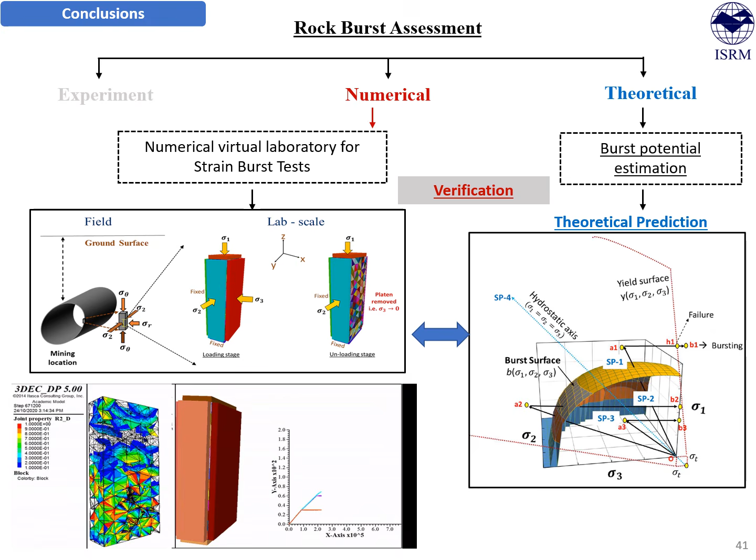That leads to the conclusion of my presentation. The key output of my PhD research is an energy-based framework to quantify the burst potential of rock.

In the next few slides, I will try to demonstrate its potential applications in situ ground conditions and future scope.

This slide presents the application of the developed strain burst energy-based framework in one of the underground mine operations as a case study, which is the Golden Grove operation located in Western Australia. The details of the underground mine, located at 1300 meter depth, along with rock type and in situ stress conditions, were already published in one of the conferences.

The application of strain burst criteria in this underground scenario will be presented in an upcoming conference, RaSiM11 in Sweden this year in August.

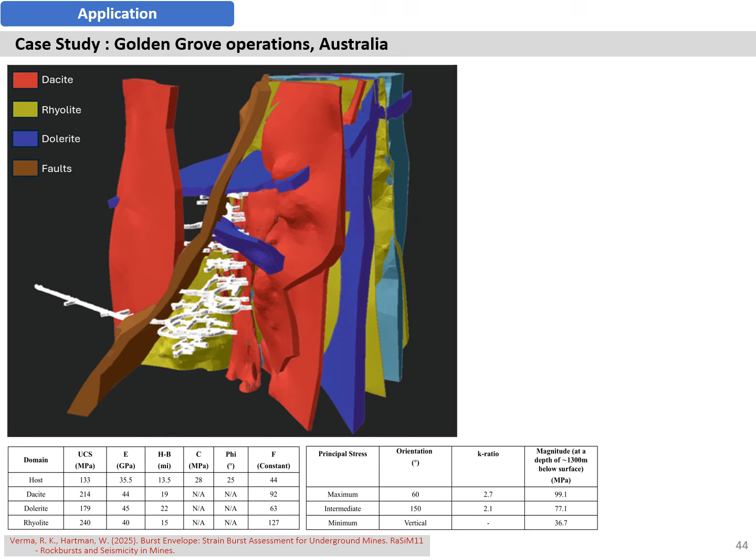We can see that there are four major rock types: dacite, rhyolite, dolerite, and host rock. The in situ virgin stress state is also presented. Now, what we did is we applied a strain burst assessment, and that's the result we got.

We can see that there are two scenarios: the first one is the virgin in situ stress state, and the second one is the resultant stress state after the underground excavation, in the form of drive cuts or stope firing.

Now, if you see, for virgin in situ stress state, all four rock types do not demonstrate potential to undergo strain burst. Whereas when we excavate, the resultant stress state around the opening changes, and because of that, we can see the potential of host rock to undergo strain burst with the magnitude of 1.9. If this burst index is higher than 1, that means it has a potential to burst.

Now, only the host rock has the potential to undergo strain burst. Apart from that, the other rock types do not have the potential to burst. In terms of stress state, both resultant and virgin in situ stress states are all inside the burst envelope of

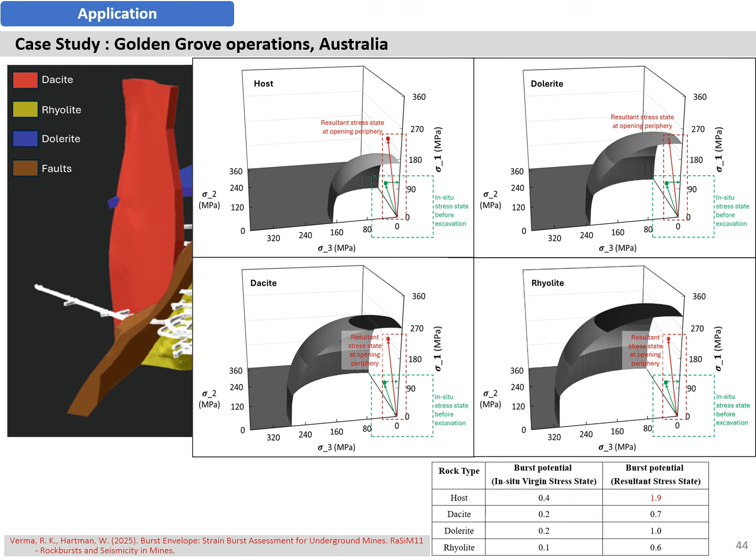each rock type. That means there will be less likely chances for these rock types to undergo strain burst. Now, what happened in underground scenarios? So this is our prediction. Now, in underground scenario, as per the published paper, the failure of rock mass has been recorded mostly in host rock, not in other rock units.

Now, we are saying failure. We need high in situ observations and recording of these failure types and their characteristics to identify whether these are bursting events or conventional failure events. Because the strain burst magnitude, even from the theoretical estimation, is not very high. It's just 1.9. That means even if this bursting might happen, it will be difficult to characterize or to differentiate that bursting from conventional failure.

If the magnitude of burst potential is much higher, for example 7, 8, something like that, which could create a clear seismic event in the form of bursting, then it can be clearly identified. But when the bursting happens at very low magnitude, it becomes practically difficult to identify, to differentiate it from the conventional failure. And this might be the case in the underground scenarios where the failure has recorded in the host rock, but there were no comments made about the characteristics of these failures.

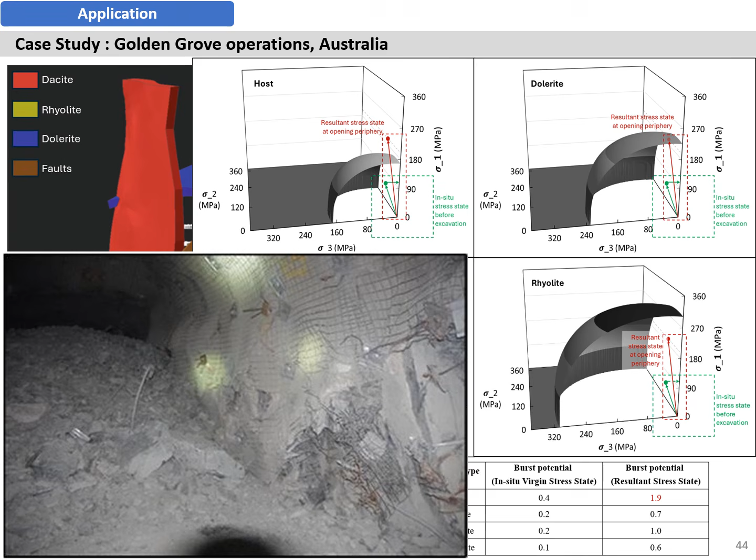So these observations are in line with our theoretical predictions. Yes, we agree we need more data, more underground scenarios to justify, to clearly state whether it's a bursting or a conventional failure, on which we are currently working. We are also collaborating with other underground mine sites where strain burst events has been recorded to get those data and permission to publish the data in collaboration with our developed strain burst criteria.

Now, apart from that, this developed energy framework can also be used to assist in designing underground support in underground scenarios where dynamic failure of rock is expected in the form of strain burst or rock burst. Because as you can see, this burst framework can help in evaluating the burst phenomena and the possibility of that phenomena in given underground mining conditions.

In addition to that, it can also help us in evaluating the load requirement, especially the dynamic load requirement, based on the strain energy storage and releasing characteristics of rock around the opening. And it can be directly used to quantify the burst potential of rock and the factors which can impact the strain burst tendency in the given underground scenarios.

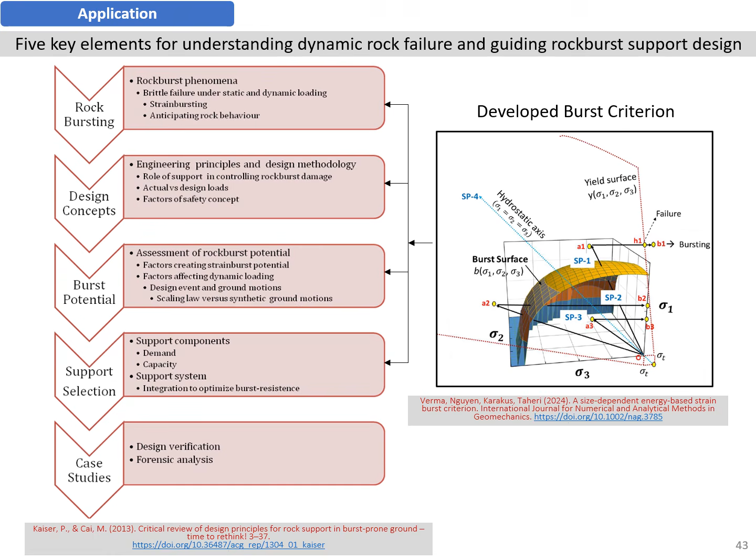And as mentioned earlier, it can help us in deriving the dynamic load demand, and based on that, the ground support capacity, whether it's sufficient or not. If it is not, then what sort of ground support that can be used. So it can pretty much help in assisting in the design of underground support for dynamic loading condition.

These are the list of key publications which came from the presented research work.

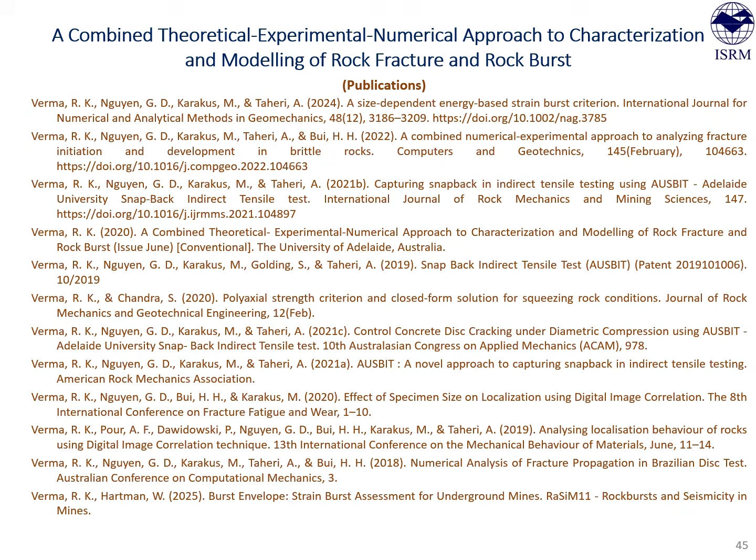Yeah, we were very happy and glad that our work that we conducted was recognized globally and awarded the Rocha Medal Proxime Accessit. Yeah, the intent was to make a contribution, a meaningful contribution to rock mechanics and underground mining society, and we always try to improve and learn.